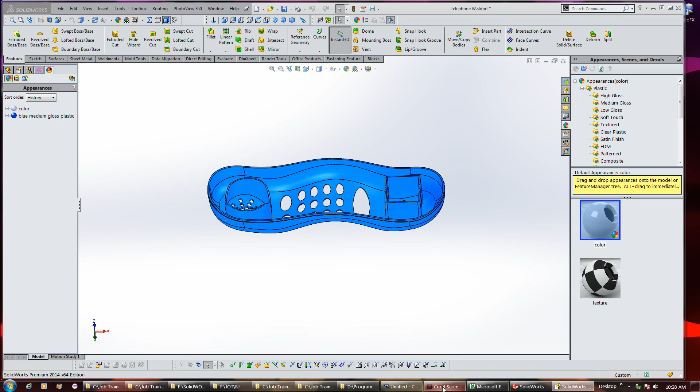Okay, this is basically going through the full process of adding some bosses inside here and then doing a mold cavity, which I only was able to watch a video of being done, so it'll be kind of neat to do it for real. I'll probably end up doing it again later if you get a plastics machine. I think I did this three years ago.

Anyway, let's see, mounting boss, right? Okay, gotta insert it right there.

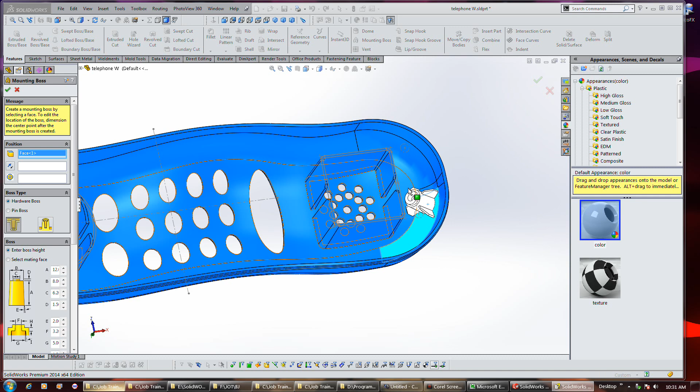There's actually a circular sketch drawn on there. I didn't see that. Right there, that's actually part of this sketch here. See it? So, that's interesting.

Mounting boss, okay, I'll select the face. Right there. Okay, and then select circular edge to position the mounting boss. I'll select that circle.

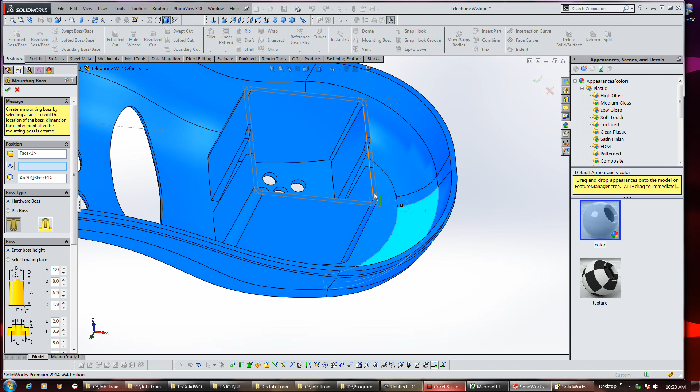And for select direction, choose this top face. We're going for pin bosses here, so we put a female pin boss.

And the diameter of the base. God damn it. Anyway, I'll fill these properties in. Diameter of the base is 5.

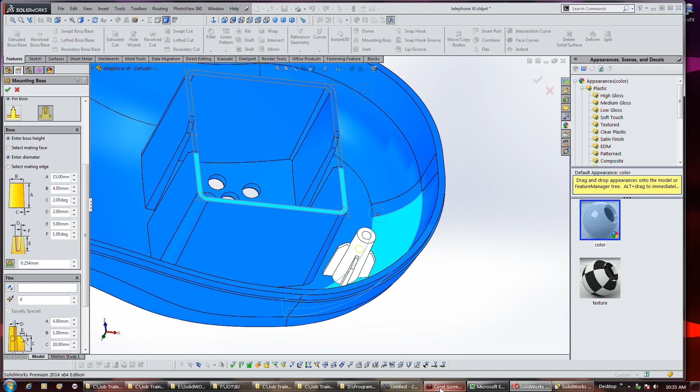Draft angle of the main boss is 1. Anyway, I'll just tell you what I did. Diameter of the boss right here is 5.

Click select mating face. Okay, then select the top face of the boss, as you did in step 4. This is right here.

Alright, that brings it up to that height. Okay, and the draft angle should be 1 degree. God damn it. The main boss should be 1 degree. Okay, and then the height of the whole pin should be 20 millimeters.

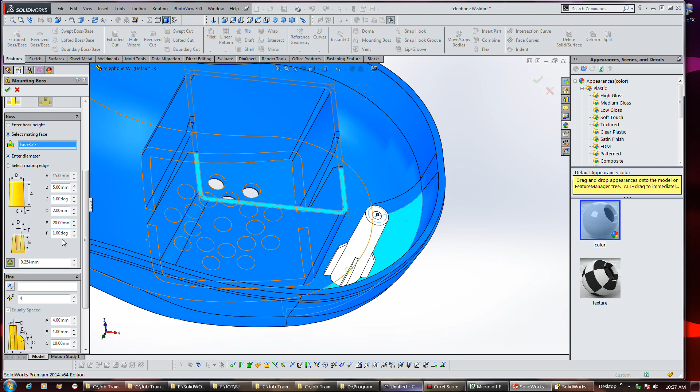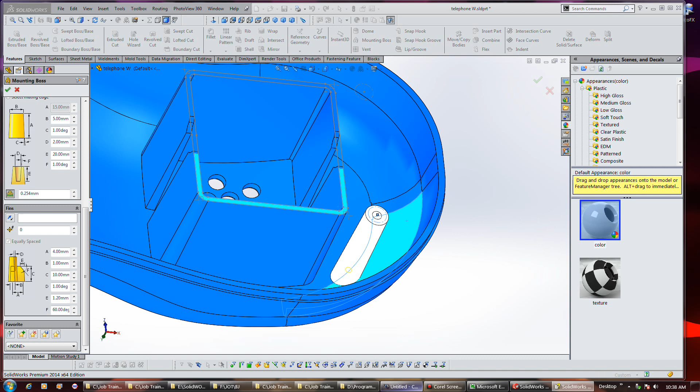Where the hell is that? Set inner number of fins to 0, so we don't want fins in this. Click OK.

Okay, so I need to do that again to create one over here, apparently. So I'm going to select that face. For the direction, let me use the filter face option.

Okay, and for the circular edge, where'd the damn sketch go? Right here, I can hardly see it. Okay.

And I guess we want a hole here. Select that. Okay, and damn it. Okay.

It's already about that height. Draft angle of the main boss, 1 degree. Height of the whole pin, 20, 0 down here. Diameter of the boss, 5. Okay.

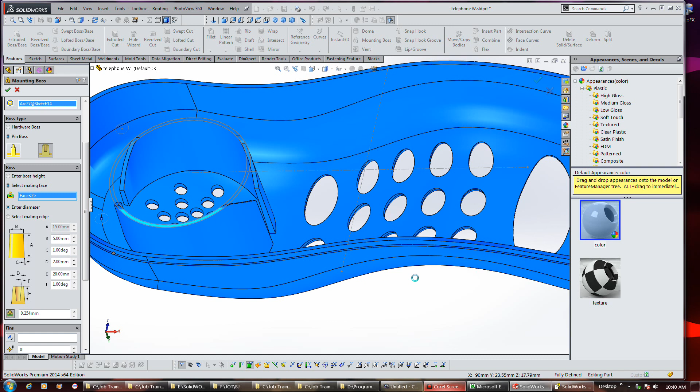Alright, that should do it. Now I assume we're going to mirror these features.

Damn it. Okay, I'm going to select this point. No, oh god damn it. Okay, select that point.

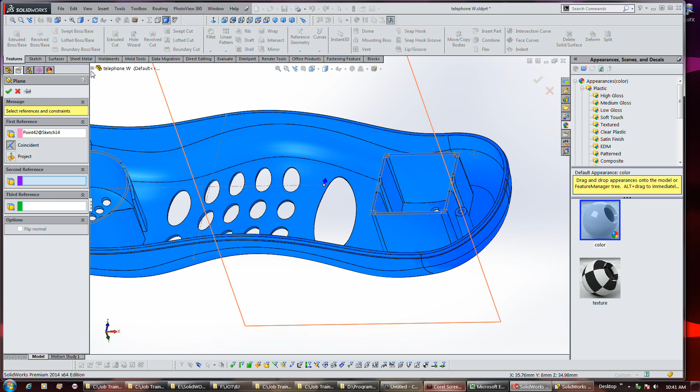Front. Okay. And it's going to be our mirror plane. I don't know why we couldn't just use the standard plane. Didn't they draft this thing right? Well, I couldn't use one of the standard planes.

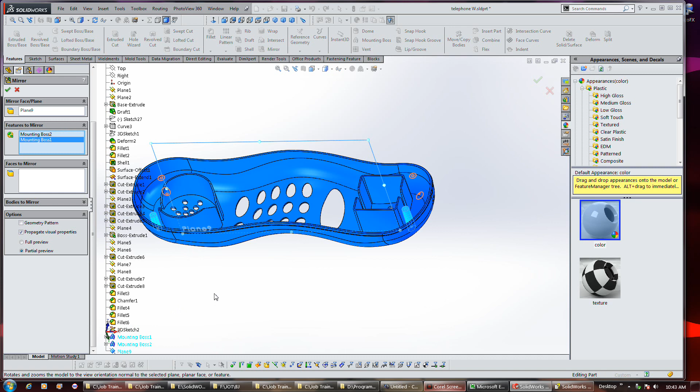Okay, now features to mirror. We're going to want to mirror these two bosses we created. That should get her did.

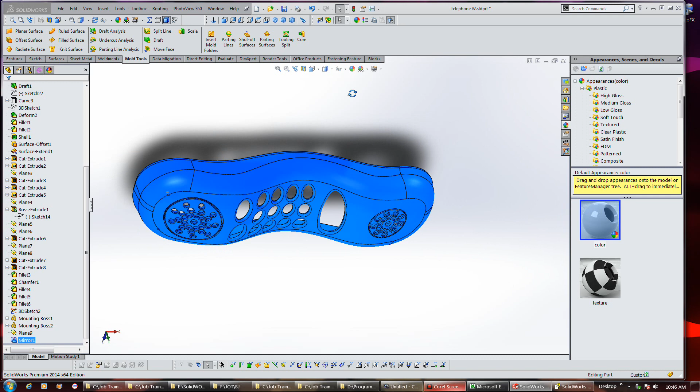Alright, oh shit. Let's put this upside down. Okay, let's go do a draft analysis. Direction of pull should be the top plane.

Okay, set the 0.5 as the... anyway, our direction of pull is up. Okay, now we got some draft issues along here. This looks pretty good.

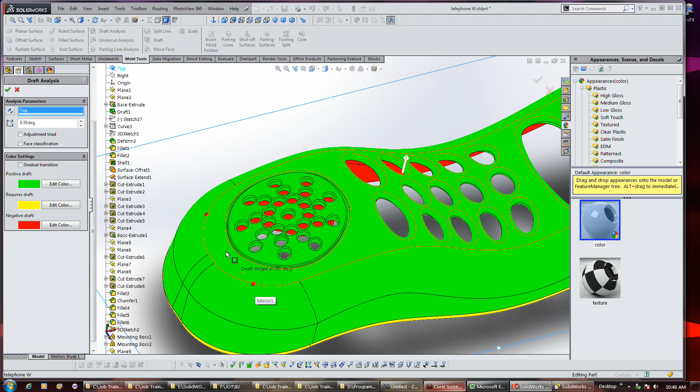On the bottom, what the hell is that? Well, that's not supposed to be there. They're probably putting that in there on purpose. Yeah, that definitely shouldn't go all the way through.

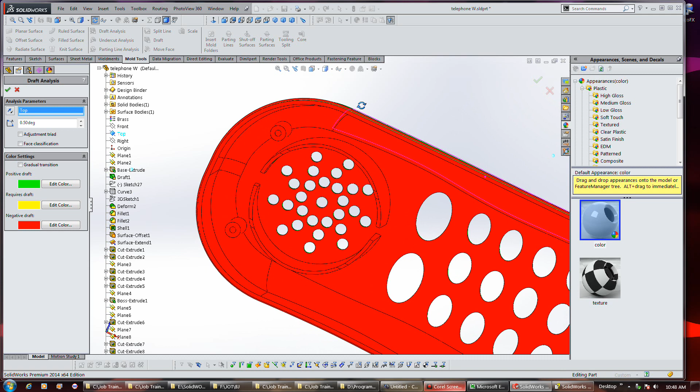Edit. Okay, we don't want that to go 20. Let's take it to like 15. Looks like that did it. Okay.

Yeah, the only issue we have is that has 0 draft on it, so that's going to be an issue. So selecting face classification, it tells you how many faces - 8 faces that have draft issues on them.

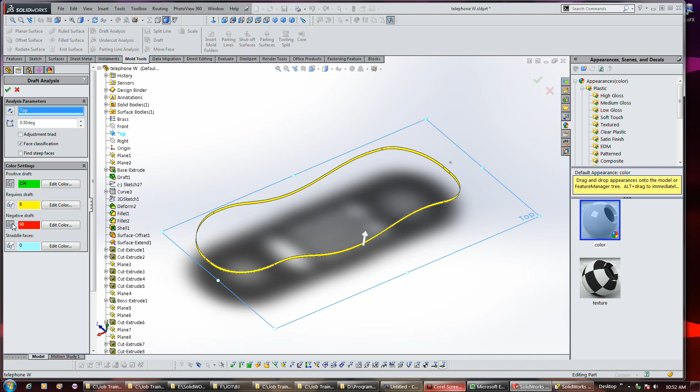And you can hit the show/hide button, which leaves us with those being the problem faces, which are clear enough to identify.

Okay, now we're going to go do a draft and do a parting line draft, and this is in the Mold Tools version. Set angle to 1 degree, which it is. Under direction of pull, select the top plane. Okay, so we need the arrow pointing down, and that makes sense.

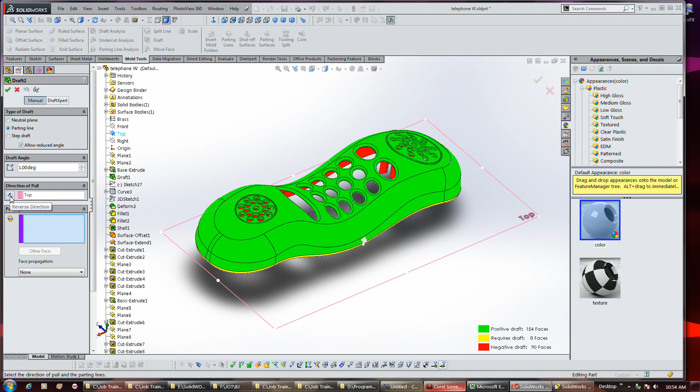This is the arrow we're going to be screwing with right there. Okay, so I'm going to select each edge along the bottom of the model, but I can use the select tangency command on it, and pull in all the edges.

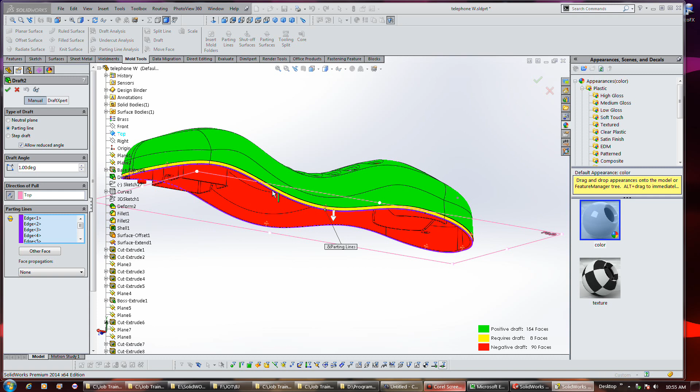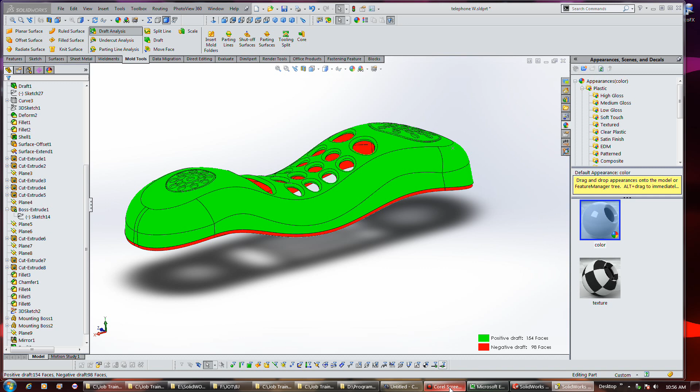Now we've got to scale the part using this scale tool to account for plastic shrinkage in the hot mold, and we want to scale about the centroid. Uniform scaling set at 1.05. Set OK. And that just blows the model up, for the purposes of our mold, I think.

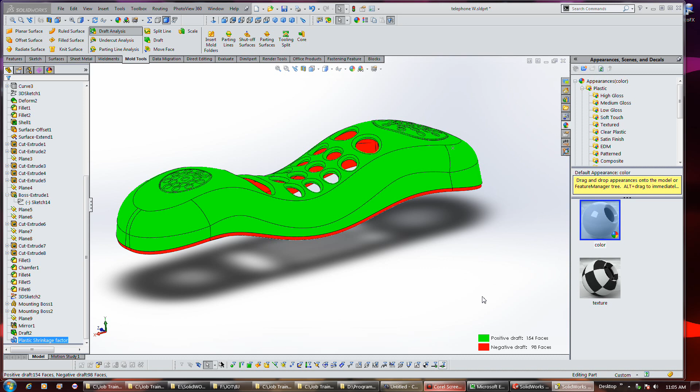When bosses are attached to walls, which is best to avoid if you can, but if you've got to put a rib to the wall, it's best to make that very thin, about 50 to 60% of the nominal wall thickness, so it'll prevent shrinkage.

It can create sunken areas basically where it attaches. You should definitely never, if you have like a square box, locate the boss right in the corner with no ribs or nothing, because that'll create a massive shrinkage problem around the corner of the walls. So again, inset the bosses always, like we're doing here.

Nominally, the wall thickness of a boss should only be about 60% of your nominal wall thickness.

But if the boss is going to be located in a non-visible area, like we're using self-tapping screws, you may want a thicker wall because of the stresses the screws create, so you can get away with it as long as the blemishes will be something you can live with.

Now the depth of your screw hole actually should be about 30% of your thickness into the wall, so it kind of burrows in. If you've got a wall here and there's the inner surface, this should go inside of it.

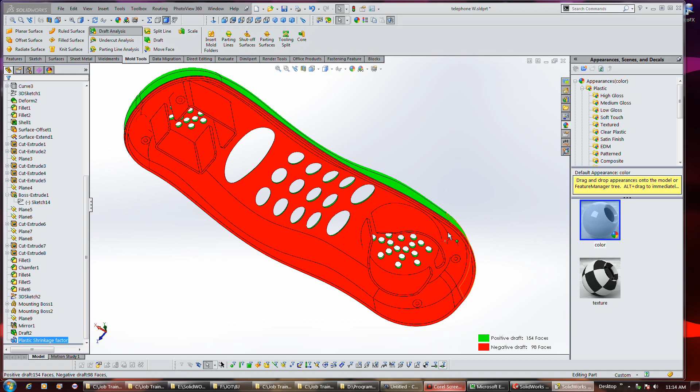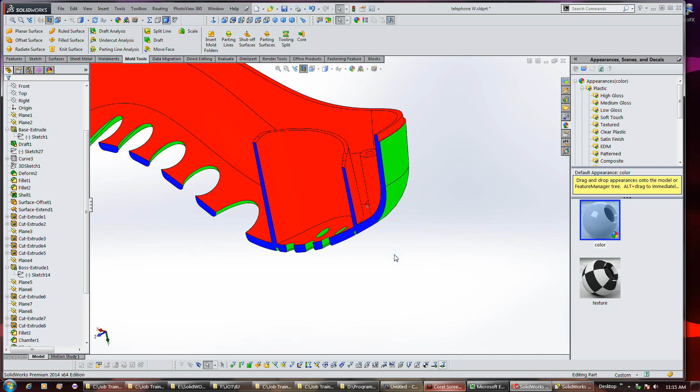But again, this hole here, just like this hole we created here, it should extend down... oh geez, I guess section view doesn't work with this thing on. Damn. Oh, it does, you just can't see it. Turn off draft analysis. Okay.

Now see, our hole right here, again, this wall thickness nominally should be, like I said, about 60% or less of our wall thickness here. And this should have a radius around the base of at least 25% of the thickness or greater.

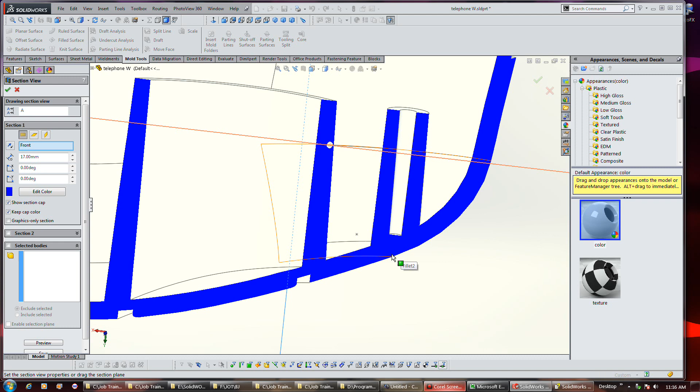And this hole should be, basically not just flat at the bottom of it, it should be spherical. And it should dip below this surface here by about 30%, so that it minimizes this wall thickness area, so it'll reduce the likelihood of blemishes, sunken areas from forming.

Now, when you do have ribs in your part, like these right here, it should only be about 60% of your wall thickness and no more for internal stiffening ribs. And if they do connect to side walls, they should have fillets around the edges as generously as possible. Again, you don't want to get too carried away to where you create blemish spots. So it's a compromise, but you're looking at least 25% of the thickness for the radius.

Now, if you have two ribs crisscrossing each other, it's sometimes good practice to core right in the middle of it, although sometimes I wonder if they're just telling you that to throw increased tooling cost at you. If you have a rib going this way and a rib going this way with a little hole right in the middle where the two ribs join, just to minimize the material. But it seems like you can create a diamond pattern or something and achieve a similar result and lower the tooling cost, because that's still a lot to try to pull out a bunch of tiny pins from a mold.

It says ribs should be limited in height to 3 times its thickness - that's 3 times the nominal thickness, though, not the rib thickness. And it's better to use more ribs that are smaller rather than one big stiff rib, for obvious reasons.

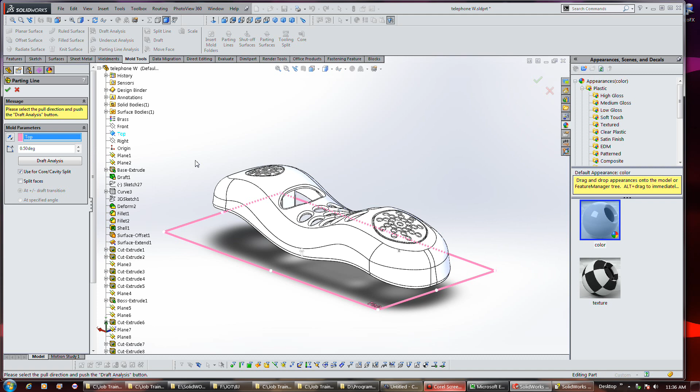The direction of pull, which is what that is. The arrow looks like it's... I don't know if there is an arrow on this. Come on, I gotta have an arrow. Yeah, I guess that's it right there.

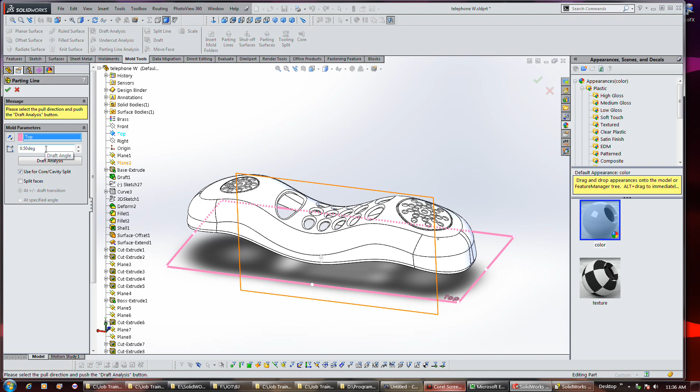The draft angle needs to be 0.5, which is set at. Draft analysis. Yeah, no is good.

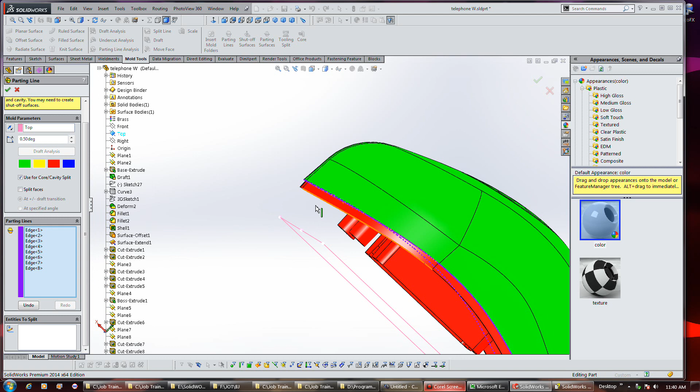And the parting lines, use these 8 edges that are the default, not fully encompassing the part though. You can see our parting lines, it's going to run right along here, and we just want to make sure there's no straddle surfaces, which is a surface where the draft angle is going two different directions, so it would cause the part to get hung up. But I don't think we should have that problem with this.

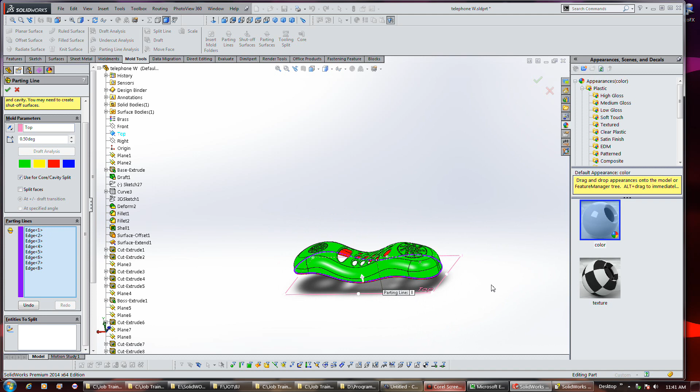It's giving us a warning saying it can't be separated into core and cavity. So anyway, I guess we're going to ignore that and just click go. Still don't know about that though. So that's our parting line right there. That's where I'd expect it to be.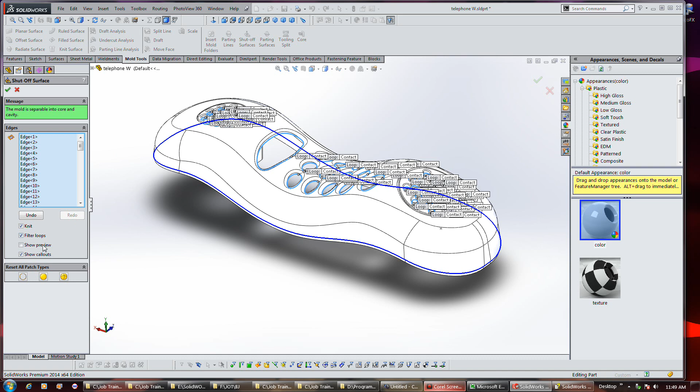Okay, now we're going to go to our shut-off surfaces. You can see a shitload of tags there. I'm going to turn the call-outs off. Now we definitely want to use knit and filter loops.

I guess they're wanting to do just contact on it, which is the default. I was thinking of trying to switch it to tangent and see what happens, but...

It's hot out there, 95. Oh, okay.

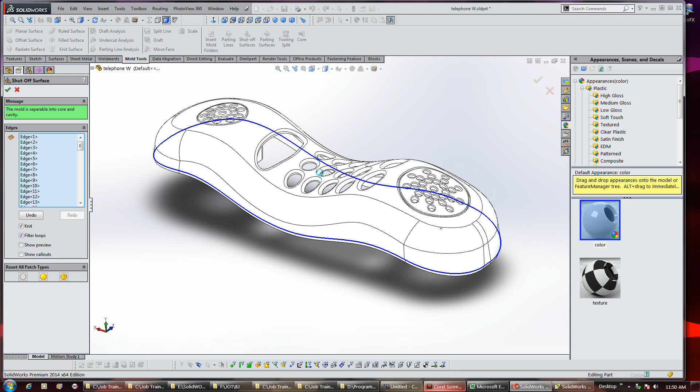Well, those generated the shut-off surfaces apparently. So I did it on that side of the draft angle. Now we should have three surface bodies here. One's the cavity, which is the top surface, and the core is the bottom surface, and then we've got a regular surface, our part.

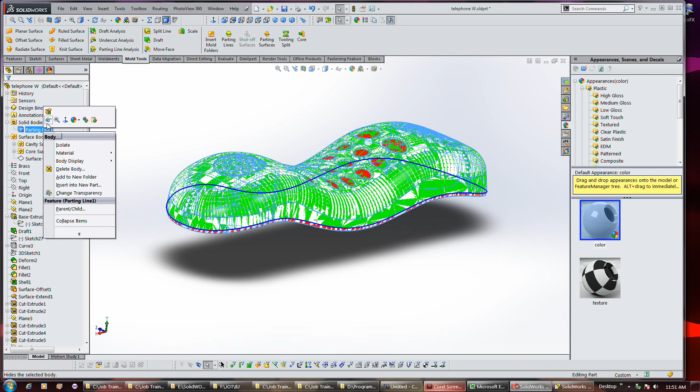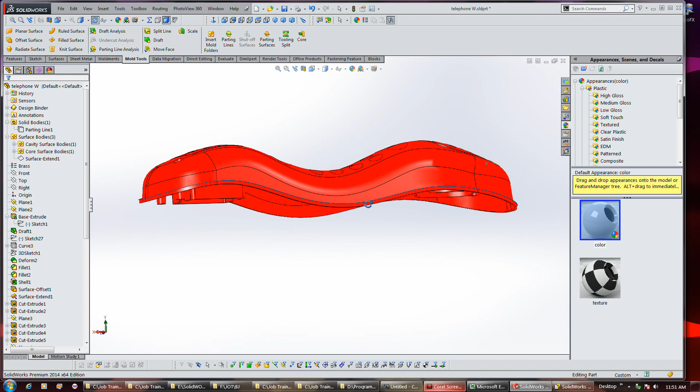So a solid body, and I can hide it, so you can see kind of what it's doing here. Pretty sweet. And hide that. So that's our core surface right there, and it goes right up flush. Our cavity goes right down into that.

Okay, now we need to select parting surfaces. Select perpendicular to pull. Set distance to 10 millimeters. Knit all surfaces and show preview.

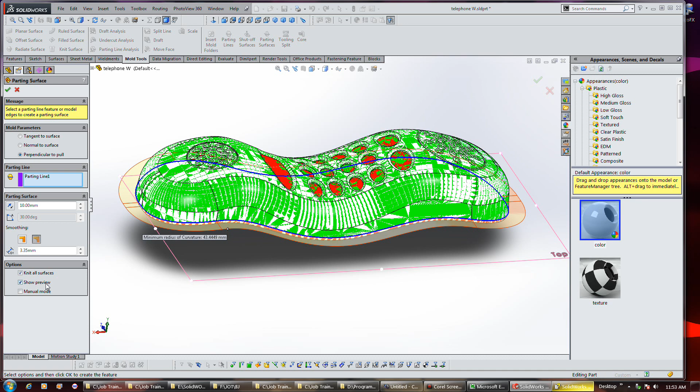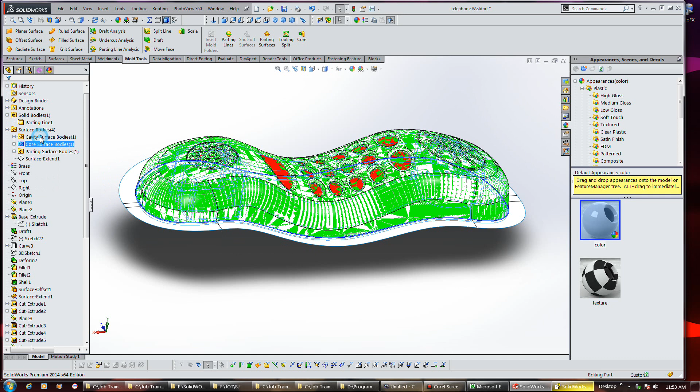Alright, and that should be up here well. Okay, now I have to go add a plane.

Putting my filter on down there. Okay, that's the first reference. Now the distance we're going to make 20 millimeters. And we're trying to go below, so that's excellent. Bingo.

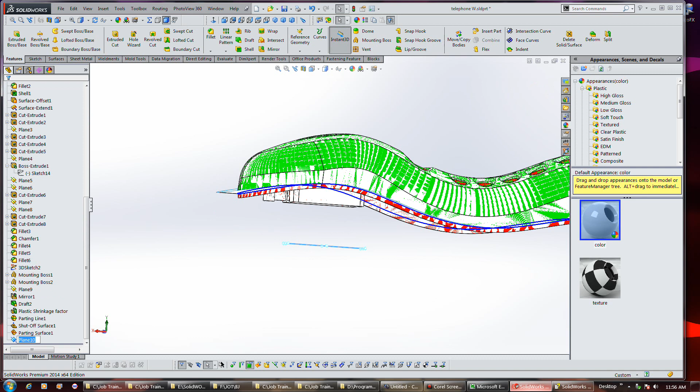Okay, now we're going to turn draft analysis back off. I guess it is off.

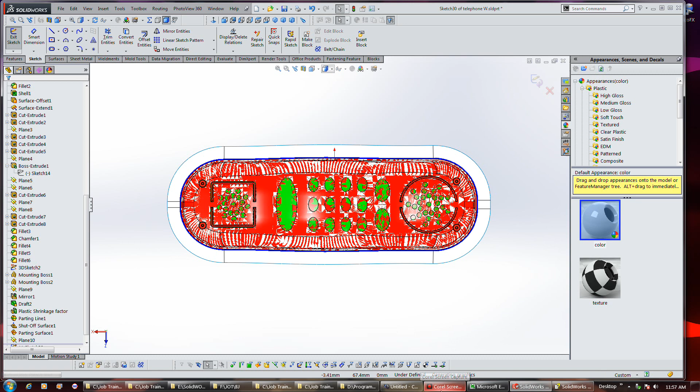Now we're going to do tooling split, which is the next step in the process. Select plane 10, normal to. Hidden lines are removed - that sounds good.

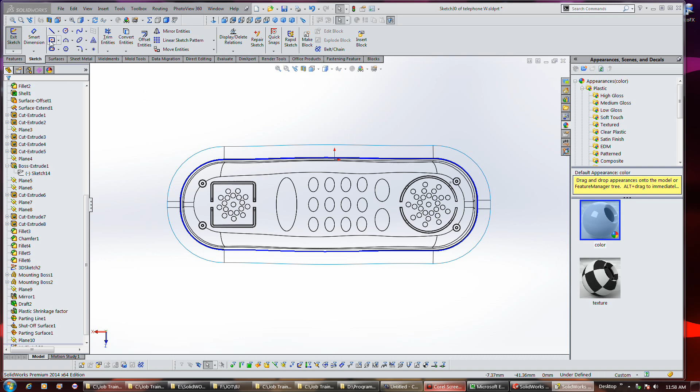Now we're going to put a rectangle in there. Well, let me just...

Seriously? You piece of shit. God damn this dumbass program.

240 by 350. Alright, now we want to... maybe I'm looking... well, their origin is in the middle of this thing. I mean, I didn't draw it, so...

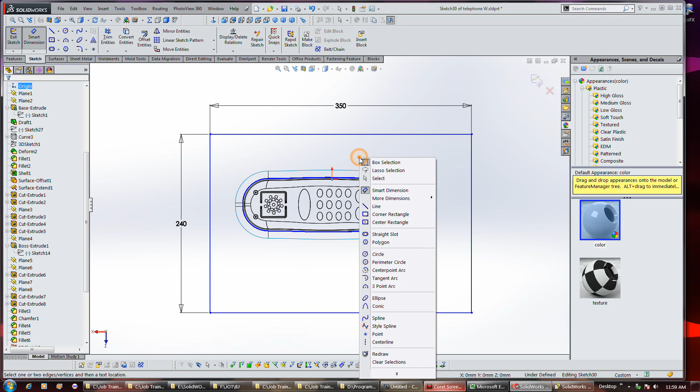I do have it reversed, but well, if I have it reversed, hold on. They're dimensioning it like over here, so it's 175. Okay, with the 85, well, I guess I'll just have to guess at it.

What the fuck? No. Piece of shit.

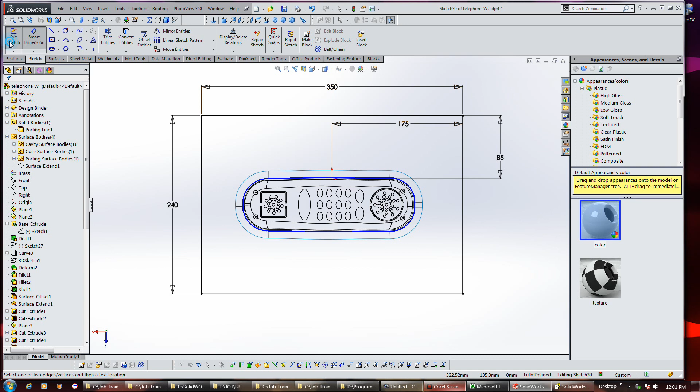Alright, that's good enough. Okay, now it's time to exit sketch. We'll set...

Direction 1 depth to 90, and direction 2 depth to 70. Interlock surface to be selected, and draft angle 3 degrees. That's about right. It has a pretty neat thing in there about side coring too, you might want to read.

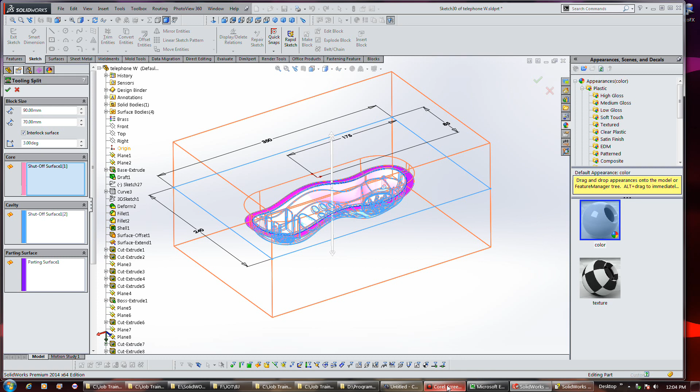Alright, now that we've completed that, we should go ahead and hide some of these surface bodies because we don't need them anymore. So, and I'll go in here and try to do an exploded view.

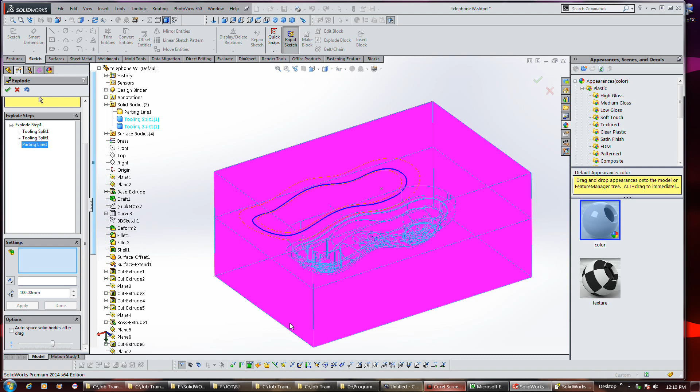I don't know about this thing. Okay, I accidentally turned on the photo view 360 thing. Where the fuck is that? Where's that parting line thing at?

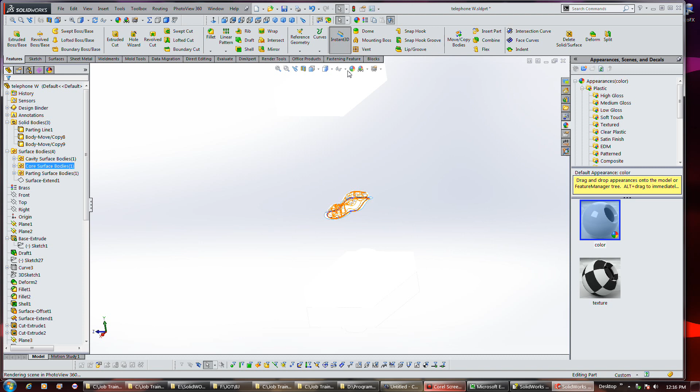Yeah, I gotta turn this thing off. It looks better, I don't know why everything's white. I don't know what I'm looking at here. Oh, I don't want to do that. Go back to shaded mode.

Okay, well, parting line is the last thing that was applied to it. That's how they named solid bodies. So, parting line 1, I'll hide that. What's that mean? Why do I have 2 hide buttons?

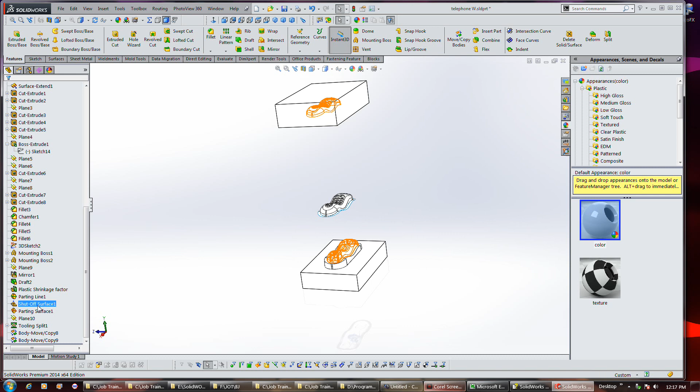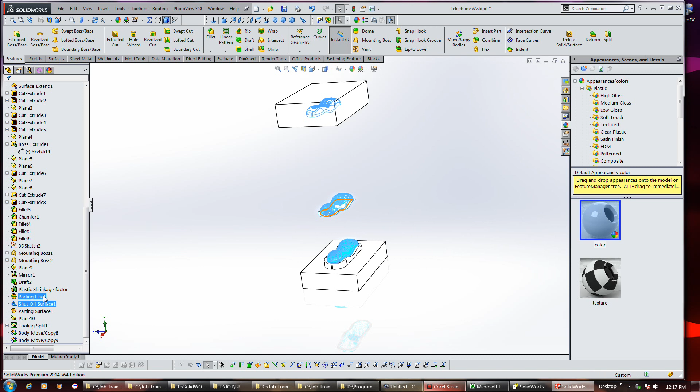I guess I can hide these too. Hide this. Hide this too. Yeah, so we got all these fucking surfaces that are hidden.

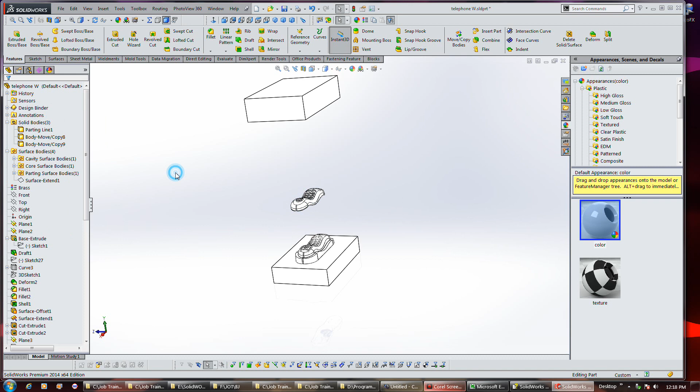Okay, well, now our thing has disappeared. Unhide. Yeah, I still don't know why this is fucking white now as opposed to, I mean, how the hell did that happen? And what am I looking at?

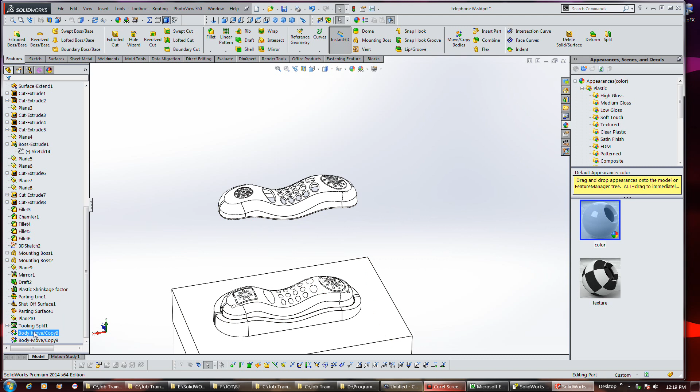Alright, well, whatever. Yeah, I don't know what the fuck I'm looking at though. I mean, this is, I don't get it. I'm trying to make these things visible, or not white. I don't know how the hell they get white. Not white.

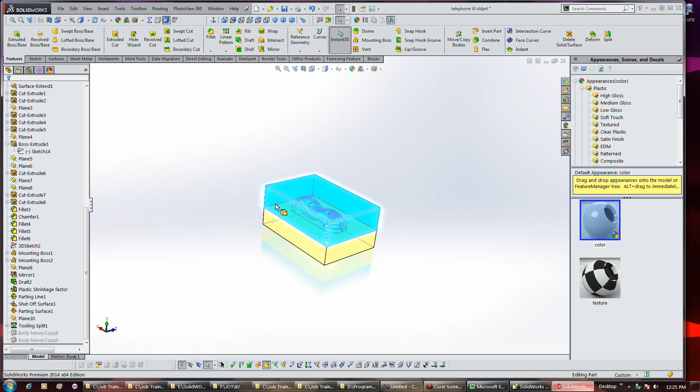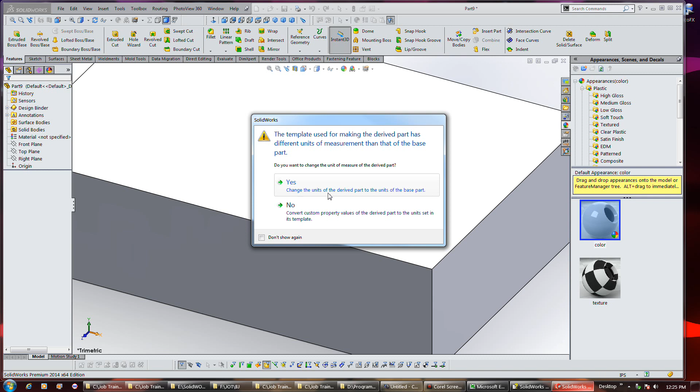Idiots, they shouldn't put those goddamn things. Whatever. Okay.

Doesn't look so awful after all. Okay. Got my selection filter on the solid body. New part. Bottom mold. Okay.

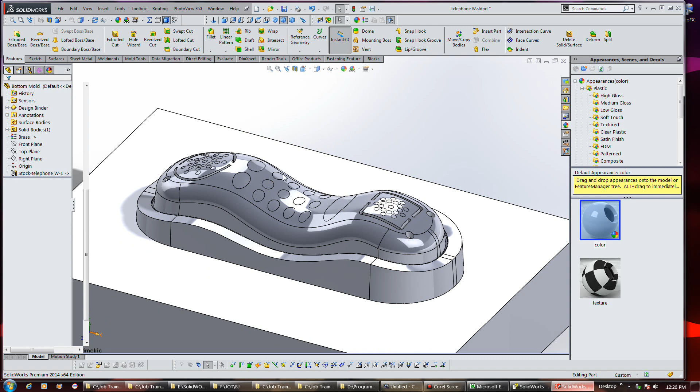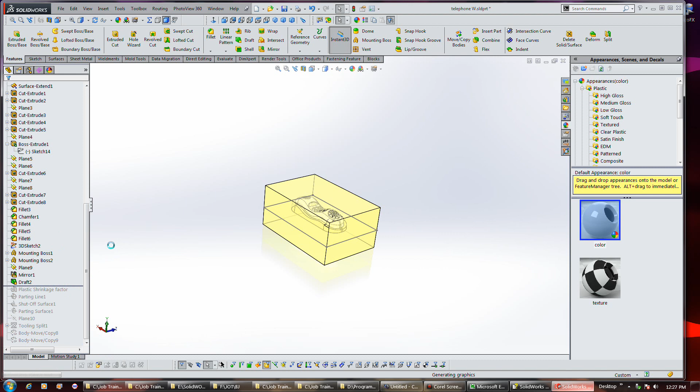I don't know how the fuck we get back to the telephone we started with. Let's see, I'm going to whirl it back through here. I don't know, it's still not far enough. I don't know what the hell happened to it. I mean, why is it white?

I mean, it already says it's high gloss. I don't know what the fuck happened to it. There's no... yeah, I mean, I don't know what the fuck's going on with it. Yeah, but I can't change its appearance in any way, shape, or form.

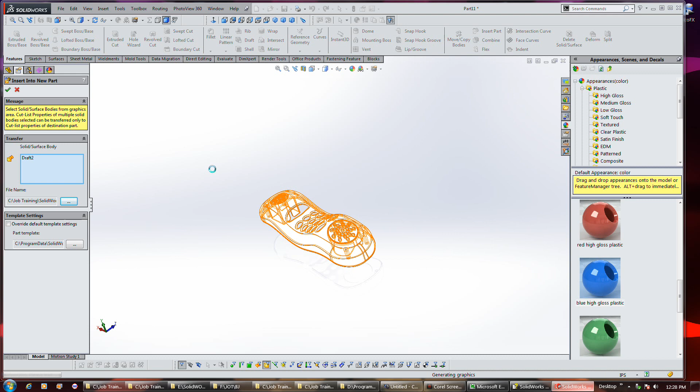There we go. And this should be pre-shrinkage. Okay.

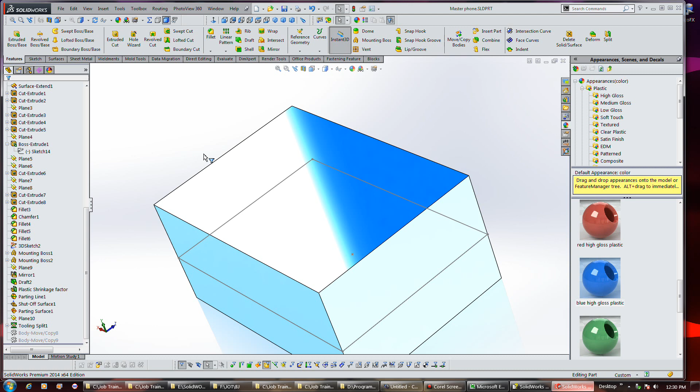Okay, I don't know what I did on my transparency settings, or what the fuck is going on. I guess the block is blue, because it turned everything blue when I hit that. Great. Oh well. Anyway, I'm not going to worry about it.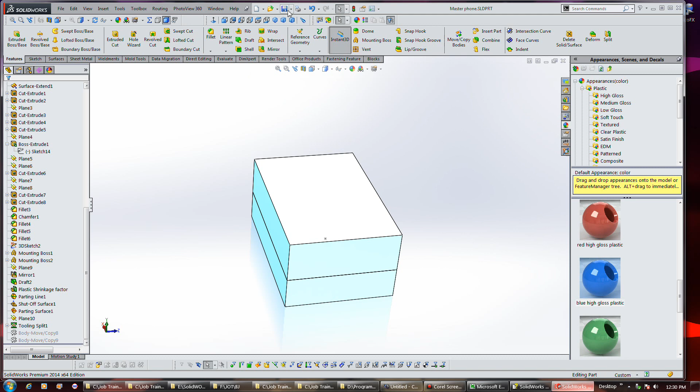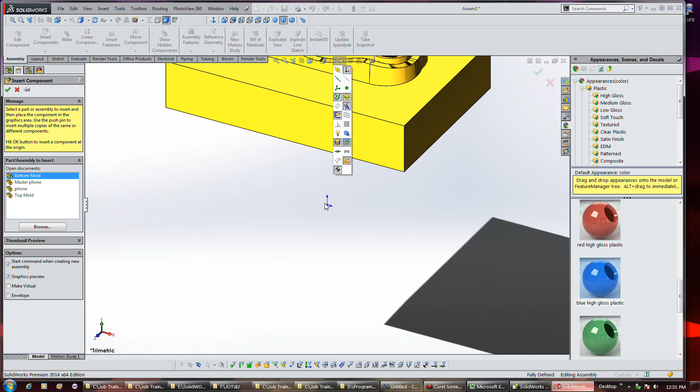Okay, let's do an assembly. Seriously? Oh, yeah, I don't have any. Shit, well, we'll just go with this. Okay. Alright. Fucking piece of shit.

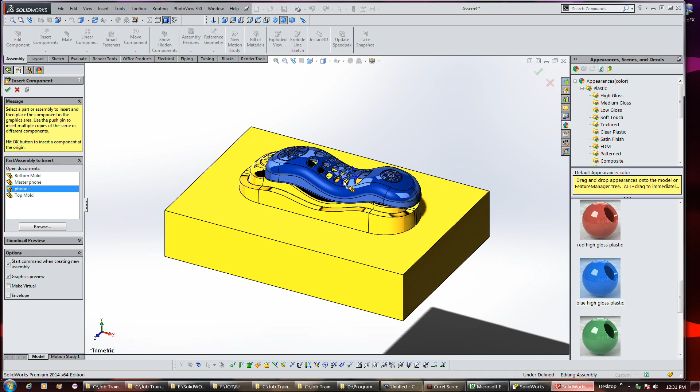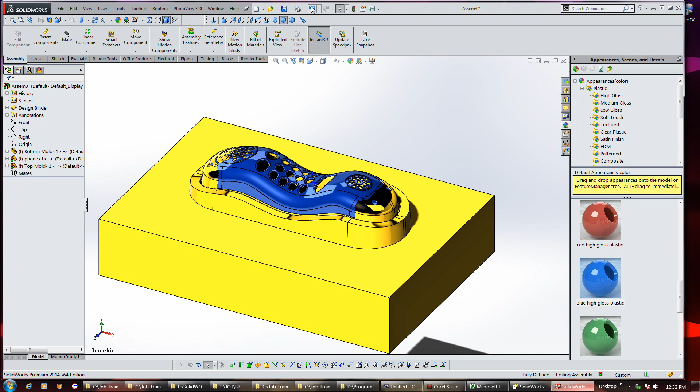Remember, this is a shrunken version, so it's not going to really fit the mold. But, what the fuck is this supposed to be? Yeah, I should fucking think so. Oh, god damn it.

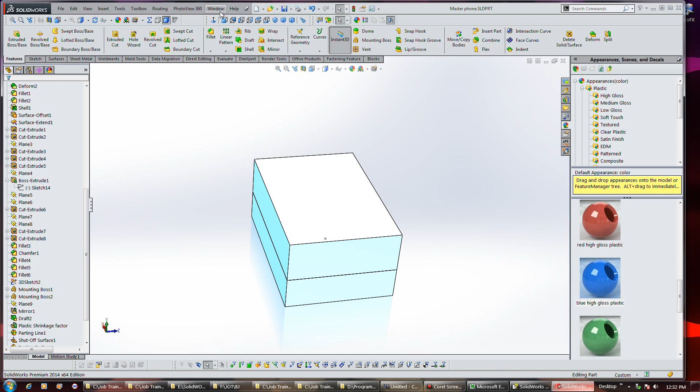Okay, so now, okay, I got these brought in. I'm trying to do an explosion diagram from the exploded view, having to select the y-axis on the gizmo there and see if that works any better. Okay, that's nice, it moved in the right direction, but it only moved one of them.

Doesn't seem to get it. I mean, I don't know why these fucking idiots... Rhino can do a goddamn explosion diagram and nothing flat, it's not that big of a goddamn deal. But these guys, no, they just can't fucking do it. They can't get their shit together.

Solid Edge can do it, no problem. Now these guys, no, it's got to be fucking rocket science, doesn't it? Bunch of fucking dumbass motherfuckers is what these people are that made this program. Let's try it again. Oh, god damn it! Fucking piece of shit.

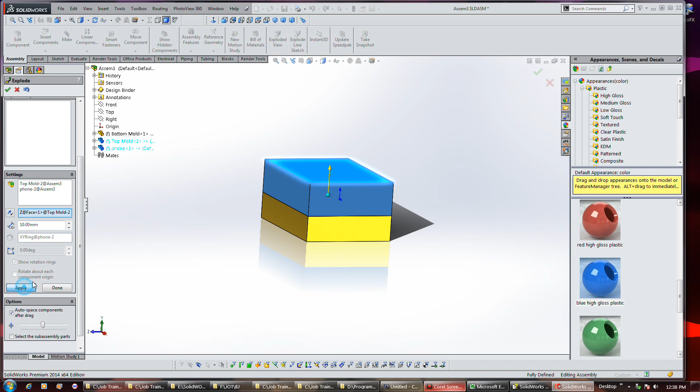I think the reason it wasn't working on this before is because it's a fixed component, but still, I thought in explosion diagrams that didn't matter. It still doesn't seem to be working. I mean, what the fuck is 10 millimeters supposed to mean?